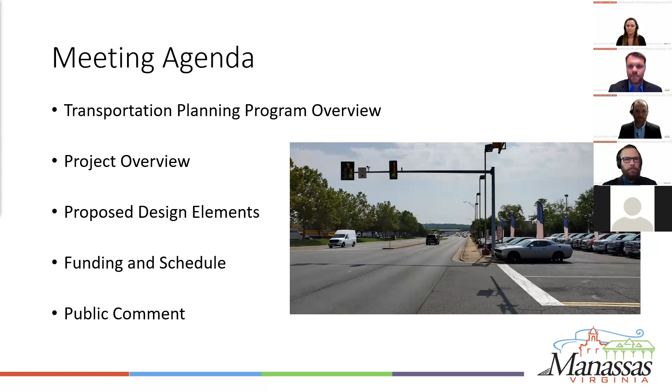For an overview of the transportation planning program, in 2016 a citizen survey was conducted, and the top priority to emerge from the survey was traffic and access.

This prompted the creation of the transportation planning program in 2017 to help take a more holistic view to planning the city's transportation network. One of our goals of this program is to make sure that the public has an opportunity to provide input on capital projects as early as possible in the project development process, which is why we're gathered here tonight to talk about this project, which is only at 10% design, and this will be the norm going forward.

In 2019, the city's first transportation master plan was completed, with the primary goal of defining the baseline of the city's transportation network and identifying future improvements to create a more multimodal network. Today, all capital improvement projects in the city emanate from this plan. The Transportation Master Plan was also developed in conjunction with the city's 2040 Comprehensive Plan Update, adopted in 2020, which identified key transportation projects to help achieve the city's mobility goals.

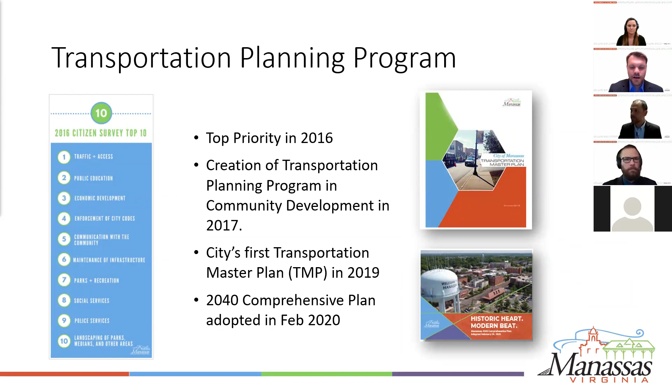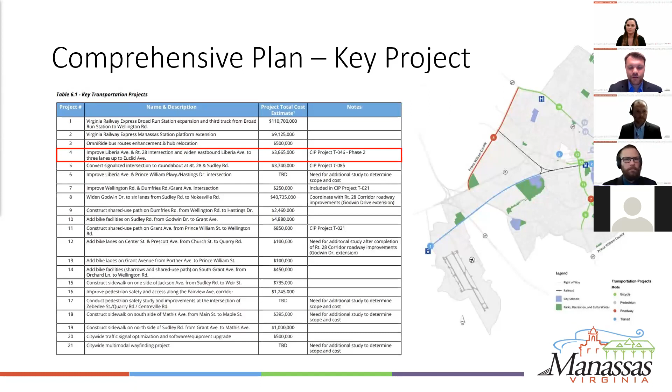The Liberia 3rd Lane project is listed as one of these key projects, and this list can also be found in the mobility chapter of the comprehensive plan, where you can also find other projects that have already been completed or that you might find built in the future.

So that was the foundation for the program. Now I'll talk about how this particular project came to being, as well as the goals of the project and what it's aiming to do. But first, we'll take a look at the project corridor.

The project is located primarily along eastbound Liberia Avenue between Route 28 and Euclid Avenue. Route 28 between Commerce Court and Liberia Avenue is also located within the project limits. As anybody who's been through here can attest to, it's a very heavily trafficked commercial corridor lined with car dealerships, strip malls, and other commercial establishments.

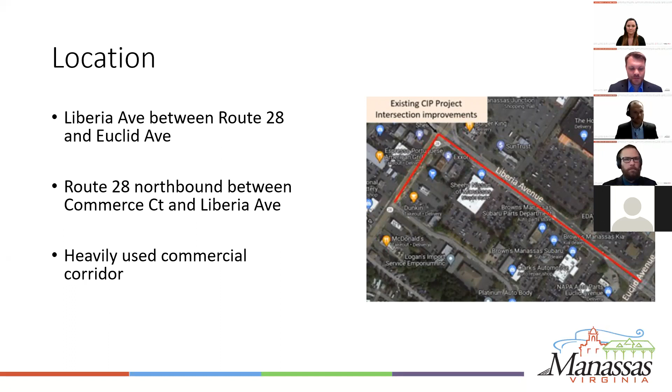The history of this project can be traced back to around 2017, when the city applied for smart scale funding from VDOT to widen Liberia to 6 lanes between Prince William Parkway and Route 28, though funding was not awarded for that project. This led to a STARS study by VDOT that looked at the corridor to try and identify affordable improvements that provide the best bang for buck, which would help put the city in a better position to obtain smart scale funding in the future.

Among the recommendations from the study were a signal optimization project, which has been completed, as well as widening Liberia Avenue between Route 28 and Quarry Road, although south of Euclid Avenue, the railroad bridge presents a challenge to doing that. Plus, our traffic models show that the largest benefits for the potential cost will be west of Euclid.

This corridor was again reevaluated as part of the initial 2019 Transportation Master Plan, where the city traffic model recommended widening Liberia to 3 lanes in the eastbound direction between Route 28 and Euclid.

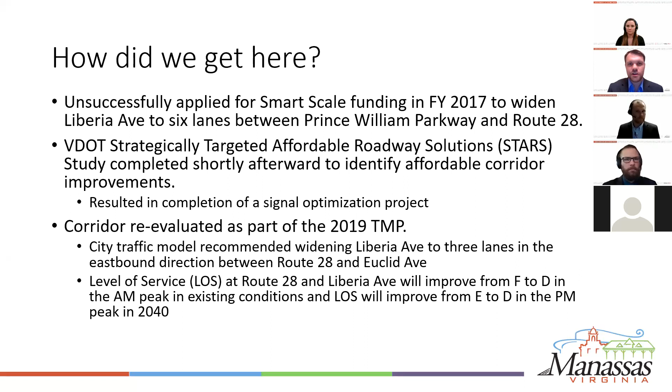The existing conditions analysis of the TMP also observed a level of service of F in the morning peak hours and E in the evening peak at the Route 28 and Liberia intersection. This project will help improve the level of service to D in both the AM and PM peaks in 2040, in conjunction with the intersection improvements at that intersection.

All the studies up to this point have identified similar concerns for the Liberia Avenue corridor. The project goals seek to correct the identified issues, including congestion relief, as well as improving the connectivity of the regional road network to surrounding jurisdictions. The project also looks to improve pedestrian safety and access management along the corridor.

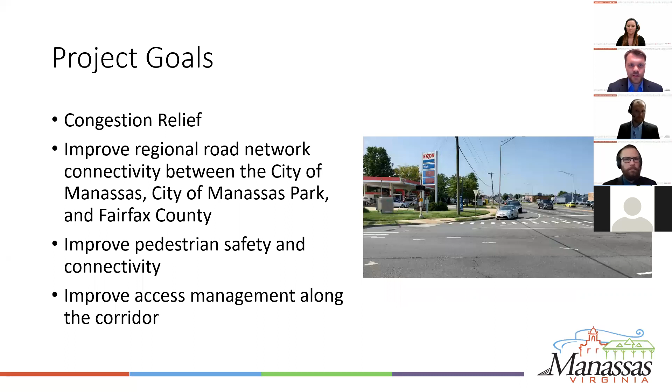As I said before, we're currently at 10% design, which is pretty early on in the project schedule. The concept was developed in January, and we are now nearing the end of the planning phase, which will conclude with the end of the public comment period around December.

The team narrowed proposed improvements down to 2 alternatives, but the final preferred alternative could be a mix of these or a slight revision. We're looking to advance the recommendations from the STARS study and the traffic model analysis from the TMP by widening Liberia to 3 through lanes in the eastbound direction between Route 28 and Euclid Avenue.

We are also looking to extend the existing Route 28 northbound left turn lane onto westbound Liberia Avenue.

Pedestrian improvements will include sidewalk infill along Route 28, along with a wider sidewalk with a 3-foot buffer along eastbound Liberia, as well as new pedestrian crossings between the driveways on eastbound Liberia and at the intersections with Manassas Junction and Euclid Avenue to help pedestrians more safely cross Liberia.

We would also like to coordinate with OmniRide, the local bus service in Prince William County and here in Manassas, to improve future bus stops and potential pullout lanes along this stretch.

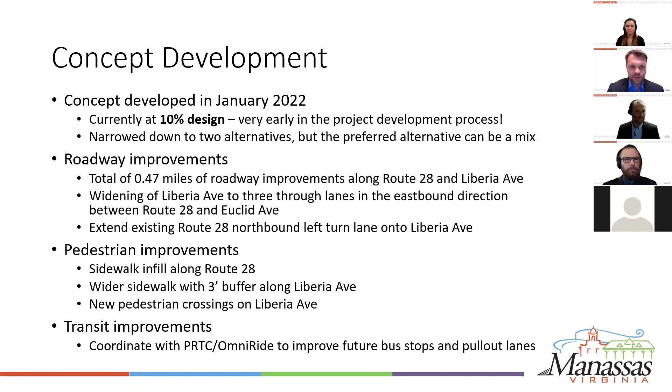So now I'll turn it over to John, who will talk about the design elements and the more technical aspects of the project.

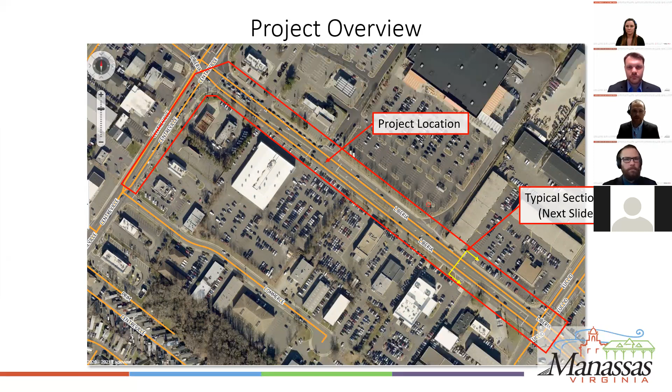I also just wanted you to note the location of the yellow typical section annotation there on the southern end of the corridor. That's going to be referenced here a few times in slides coming up.

So referencing back to that typical section, this is basically looking south in the existing condition in the middle of the block here between Liberia and Euclid.

The existing conditions of the corridor have 2 through travel lanes in each direction, and a 17.5-foot wide two-way left turn lane in the middle, which is very wide. We have an existing 8-foot sidewalk on the north with no buffer, and a narrow 4-foot sidewalk on the south side of Liberia Avenue, also with no buffer. For anyone who's spent time walking on that section of Liberia, the narrow sidewalk makes for an uncomfortable experience given the traffic volume out there.

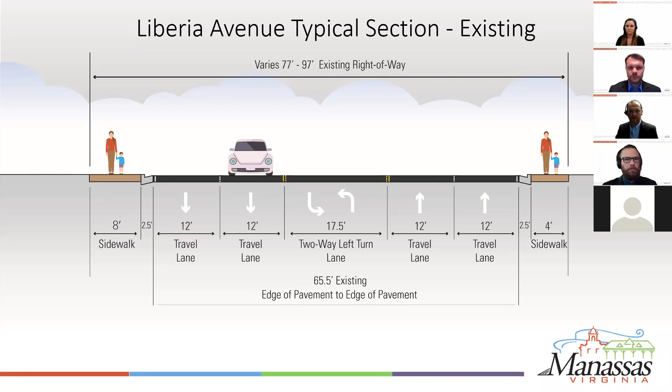So let's dive a little bit into the first alternative that we put together.

Basically, what we'd be looking at doing is adding an additional 11-foot through lane in the eastbound direction, as Brian referenced before, making for a total of 3 through lanes. We'd maintain the wide two-way left turn lane in the median, not restricting left turns any more than they already are, but add a 5-foot sidewalk with a buffer on the south side of the street. We'd also look at improving crosswalks at all the intersections and driveways along the south side of Liberia. The widening will necessitate relocating the existing signal poles at the entrance to Home Depot and Manassas Junction, Sheehy Nissan. We'd need to relocate the signal pole on the Nissan dealership side of the road to accommodate that widening.

The widening is also going to require some improvements on Route 28, basically to accommodate the turn lane from northbound Route 28 Centerville Road onto Liberia. In doing so, there are a few other operational improvements we can make on Route 28 that we looked at in this concept.

The first is to extend the northbound left turn lane at Liberia Avenue. The traffic modeling shows that this one improvement can dramatically improve the operation at the intersection. We're also looking at adding a continuous 5-foot sidewalk on the east side of Route 28 from Commerce Court all the way to Liberia.

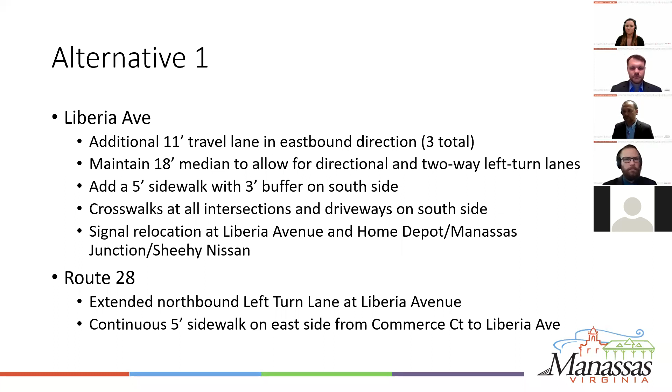Here's a look at that typical section, in the same location as the existing one we looked at a few minutes ago. Working from the left side of the screen to the right, there are no changes to westbound Liberia, no changes to the center two-way left turn lane. We're basically adding an 11-foot through lane to the outside of the existing roadway. So to the outside of the right lane, we'd just be adding an additional lane, the 11-foot through lane, curb and gutter, buffer, and a 5-foot sidewalk.

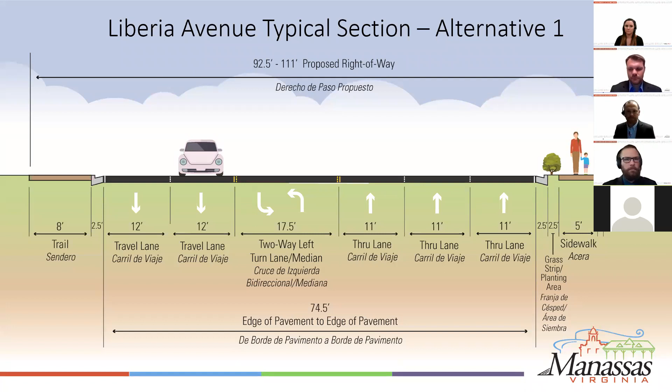So let's start with the improvements that this concept looks at on Route 28. As mentioned before, we have the extended turn lane for left turns from Route 28 onto Liberia. That turn lane right now ends near the southern entrance to the gas station at the corner, so it'd be a pretty significant lengthening of that turn lane.

The new sidewalk is also improved, continuously from Commerce Court all the way up to Liberia. That sidewalk doesn't exist right now in some areas - there's a bit of a goat path on the side of the road and no actual sidewalk, no accessible path.

So this slide rotates now and is looking down Liberia a little bit further. The intersection in the middle of the screen is the traffic signal at Home Depot. You can see that the third lane would be added to the outside, more or less where the sidewalk currently sits, and this display shows the approximate scope where that sidewalk would encroach on the adjacent car dealerships. This slide also shows the curb bump-outs at the entrances, which were incorporated to improve pedestrian safety and vehicle movements through those intersections and entrances.

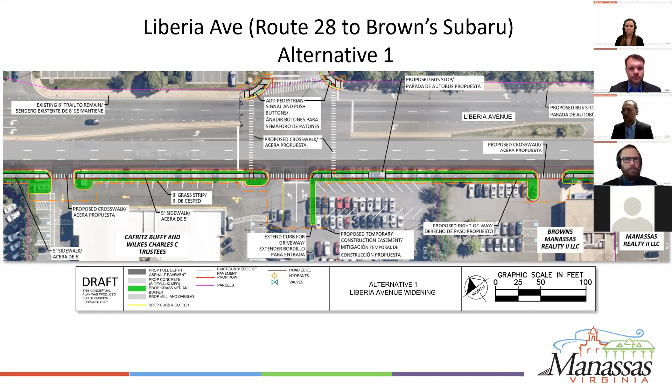We're also looking, as Brian mentioned before, at coordination with OmniRide PRTC to put permanent bus stops along this corridor. You can see one labeled here just south of the Sheehy Nissan entrance, and further south approaching Euclid, there's a second bus stop proposed, almost to 7-Eleven.

Finally, there are pedestrian improvements proposed at the intersection of Euclid and Liberia to make that a four-legged ADA accessible intersection, with pedestrian push buttons to allow safer traversing for pedestrians at that location.

There's actually another project going on at this intersection that Public Works is currently designing, which would improve three legs of the pedestrian improvements. Similar to the intersection of Route 28 and Liberia, our concept here is going to complement those improvements and basically round out anything that can't be done currently.

So we'll jump ahead to the next alternative we put together. As with alternative one, we're looking at the additional 11-foot travel lane on eastbound Liberia. But the big change in alternative two is that we're looking at a modified median configuration, which would narrow it to 15 feet and channelize the left turn lanes.

So it would no longer be, for lack of a better term, a free-for-all. There would be dedicated left turn lanes for specific entrances, which would create a much safer traffic situation with more predictable vehicle movements. We would still be adding the 5-foot sidewalk with 3-foot buffer on the south side of the street, crosswalk-style intersections.

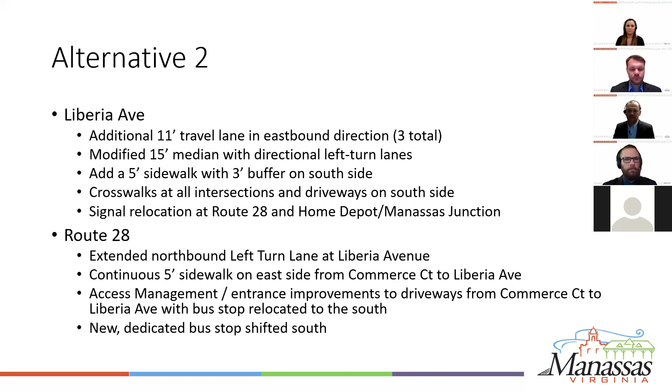But we also wanted to take a look at access management. How could we improve safety through that corridor for vehicle traffic and for pedestrian traffic along that sidewalk? That's the other change here you'll see as we get into the aerial view.

Here's the typical section for alternative two at the same location on Liberia. You'll see the big change here starts right in the middle of the screen with the 12.5-foot left turn lane rather than the two-way left turn lane that was there before. It also has the narrow raised median to direct traffic. What you'll note is that 12.5-foot lane with the 2 feet is narrower than the total width of the median in the existing condition or in alternative one.

As we project that out to the right side of the road, the remainder of the improvements are more or less the same. This results in 3 to 4 feet less right of way that would be required, meaning fewer impacts to the adjacent property owners on the south side of Liberia.

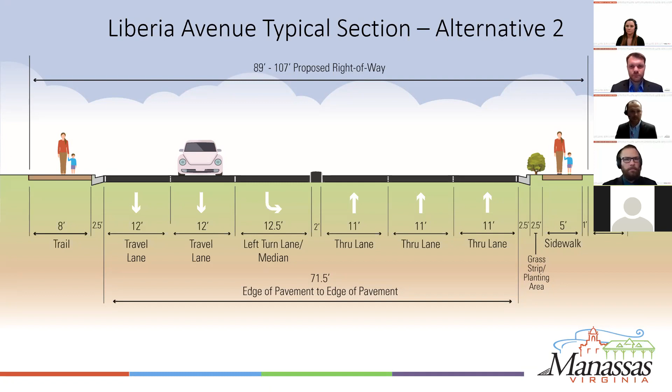So again, we'll start where we did last time at Route 28. We're looking at extending the left turn lane from Route 28 onto Liberia. The big change here, as I mentioned, is access management. We want to not only connect those sidewalks, but make them safer. How can we make those entrances safer for pedestrians and vehicles, reduce conflict points, and make vehicle and pedestrian movements more predictable to eliminate safety hazards there?

This option would also shift the existing bus stop that's in front of the gas station a little bit to the south and put it in a large pedestrian refuge island, providing a safer place for the bus to pull over and also a safer place for pedestrians to be waiting for the bus.

As I mentioned on the previous alternative, concept two would accommodate and complement the upcoming improvements at the intersection of Liberia and Centerville Road. So let's head a little bit further down Liberia once again.

Notice the median configuration is changing here. I'm going to change sides for our pictures in case that was blocked from view. We're going to be dedicating left turn lanes, and these in a future phase of design would be evaluated for the length needed to accommodate turning movements or backing up of vehicles at the intersections and at the signal.

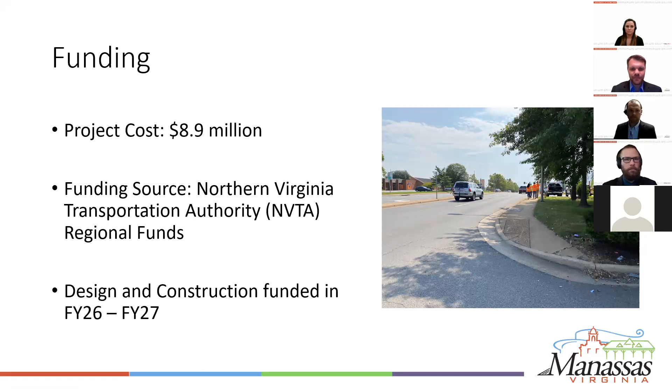Following today's meeting, as well as the in-person meeting happening in 2 weeks from now, we'll be collecting your comments and responding to them. The public comment period will conclude about 1 month after the in-person meeting, October 26th, so kind of around Thanksgiving or early December.

But we will still be accepting any public comments in the 2.5-year period between technically the end of the planning phase and the projected start of final design in fiscal year 2026. This gap period will give us a chance to see what happens with the Godwin extension project or any other major capital projects that were assumptions in that model run with the TMP, and see whether they get built or not, or if they move forward with a different alternative.

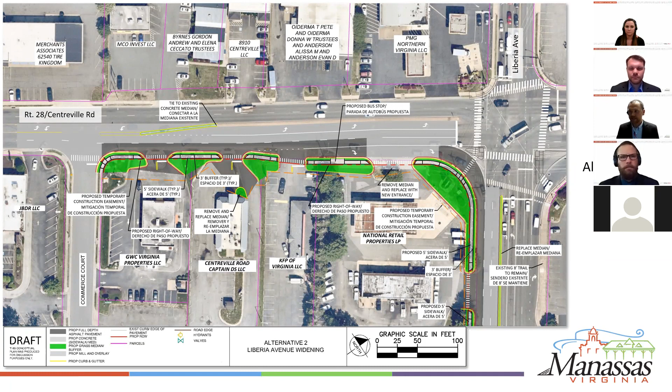I can answer that one as well, Jess. I'm going to slide back to the slide that shows it—this is Route 28, the slide for alternative 2. The number of turn lanes at the intersection of Route 28 and Liberia would not be changed. The dedicated left turn lanes we're looking at are to the east on Liberia, past the car dealerships. There are already 2 dedicated left turn lanes for this traffic signal at Route 28. It's east of the intersection at Home Depot where we'd be looking at dedicating left turn lanes.

All right, next question: will this project extend to any of the other improvements to widen Route 28?

I can attempt to answer that question too. I'm not sure exactly what other improvements to widen Route 28 you're referring to, but there are improvements at the intersection of Route 28 and Liberia that this project will complement. We're also looking at design for the intersection of Route 28 and Sudley Road for the roundabout. But as far as I know, in this area of Route 28 within the city, there are no other planned improvements to widen Route 28. There is a current project in Fairfax County where Route 28 is being widened, and the city is finishing a widening project right now on Route 28 near the Route 234 bypass on the south side of the city. But there are no plans to widen Route 28 in this area right now, as far as I'm aware.

I can jump in—thank you for that clarification on Fairfax County. I'm Matt Arcieri, Director of Planning. Good evening. We are monitoring a lot of work going on in the Yorkshire area, Prince William County, with Manassas Park, and we're monitoring progress on the Godwin bypass. There are some unknowns as to what traffic's going to do as these projects are designed and come online. Part of that 2.5-year design timeline is when we got funding, but it's also to allow us to monitor where some of these projects go, because volumes are going to be significantly impacted as major projects in Fairfax County come online. So we are watching what's going on with other discussions along 28, in that existing corridor.

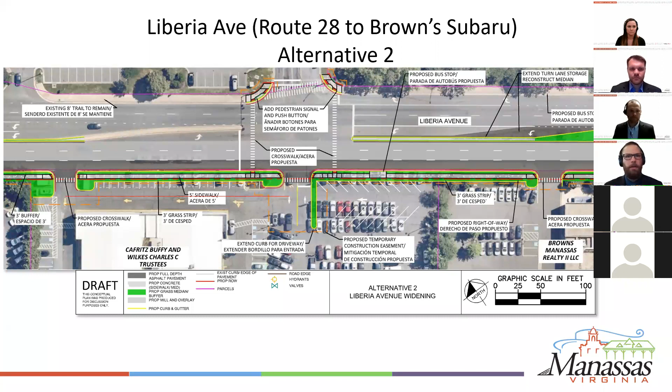There's some difficulty there as we go east of Euclid. That bridge crosses the railroad, so any impact to that bridge is, at the moment, pretty much off limits from a cost and coordination perspective. So the idea at the moment is a right turn lane.

Raymond, I see you have your hand raised. Could you please go ahead and unmute and ask your question? Thank you very much, this is Raymond Beveridge.

Good evening, and it's not really a question, it's a strong recommendation: do not wait to coordinate with OmniRide, Joe Stansby, their Chief of Development in particular. If you're not aware, the 5 local routes, what I call the 2 inner city routes, have already been redesigned, particularly Route 68. All 5 of those routes will be covered with smaller vehicles. The 4 vehicles they need are on order. For a size comparison, look over there by the H Mart when they park the OmniRide Access paratransit bus, that's the size of the vehicle. Second, as they announced in their last public hearing held at Georgetown South, they've already laid out plans to restore running from the transportation hubs in Old Town, running up Route 28. They'll cross the Fairfax line and drop at a couple of work centers over there. Frightening concept after all these years, you can actually take an OmniRide bus to get to places like SAIC over there in Fairfax. So my recommendation is get with Joe Stansby now, because they've already got their plans in motion and they've already talked about putting bus stops back along Route 28. Thank you for consideration of my pontification.

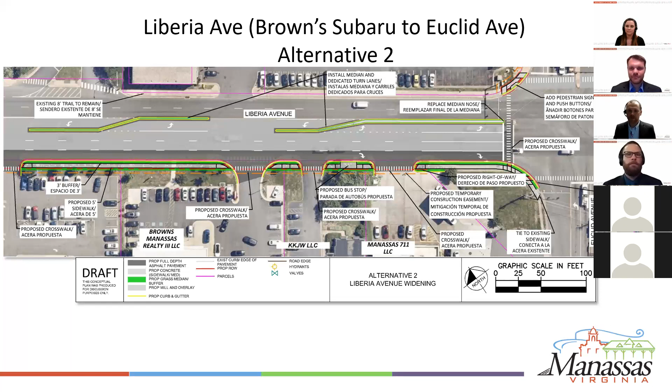I'll take a moment while it's quiet to put in a plug that I'm not sure was on the final slide earlier, that we're going to have an in-person meeting to discuss this also on October 26th at 7 p.m., in the conference room here at the Public Works building at the end of Public Works Drive. And I'll also mention, I mentioned it in the beginning, this presentation was recorded, so we'll be posting that to the project's website so that you can go back and refer to that as well. And you can continue to drop comments on that project website as well for us.

I think that's just about it, guys. Let me just say on behalf of the planning and engineering departments, we really appreciate the opportunity to be able to collect public input earlier in the process. It's not something the city has always done well, and I hope the folks on here and who watch the recording understand that we're really making a concerted effort to collect public opinion early in the process so we can actually get those comments properly incorporated at the right point in the design. So on behalf of the city of Manassas, we really appreciate folks tuning in, asking questions and submitting comments. And unless someone else wants to wrap this up, thank you all.